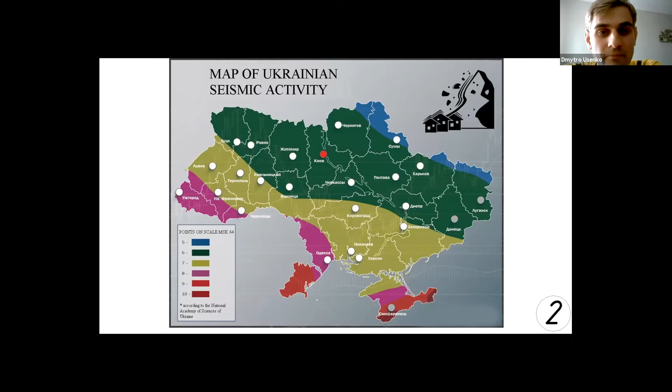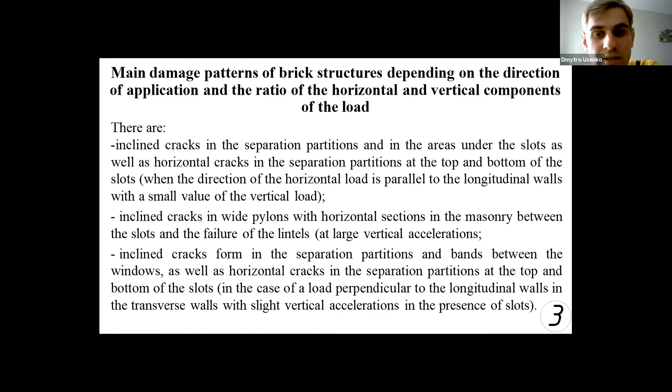So, an analysis of the effects of earthquakes made it possible to identify the main damage patterns of brick structures, depending on the direction of application and the ratio of the horizontal and vertical components of the load. You can find them on the screen. And one of the most vulnerable structures of brick buildings are the separation partitions.

Here, let's talk about stages of deformation of brick walls and methods of their calculation. On the screen, you can see the separation partitions of the buildings during operation can be at different stages of deformation. Three stages are given here. At the first stage of masonry deformation, when seismic forces are small, separation partitions work together with a window band over the entire contact area. The vertical load is transferred from the upper separation partitions to the lower along the entire horizontal section.

Subsequently, in the tensile zones of the horizontal section of the separation partitions at the levels of the upper and lower part of slots, adjacent to them, cracks form. The masonry monolithic is broken. This is the second stage of work. At this stage, the transmission of vertical and horizontal loads in the inclined sections is carried out only at the length of A sub C, smaller than 2A, where A is half of the width of the separation partition. 2A is the whole separation partition, and A is the half of it.

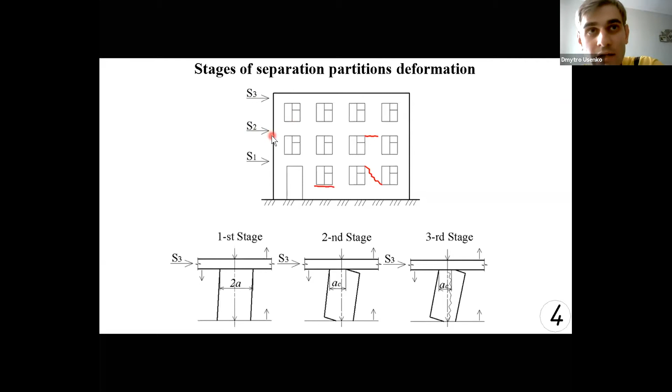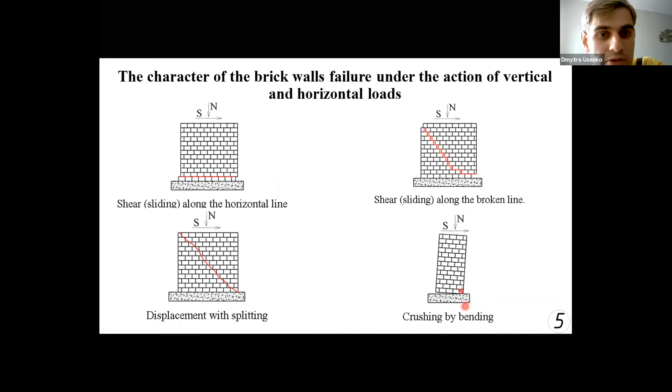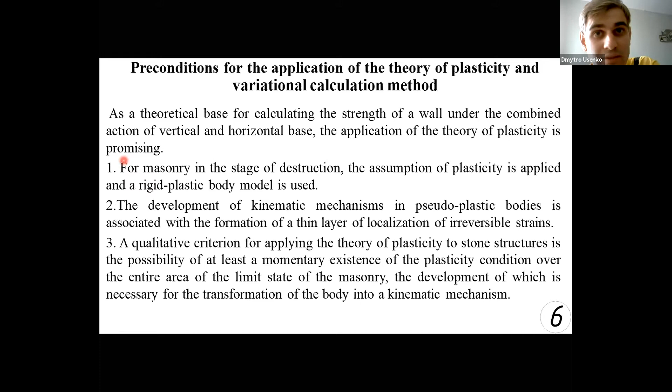The preconditions are on this screen: for masonry in a stage of destruction, the assumption of plasticity is applied and a rigid plastic body model is used. The development of kinematic mechanisms in pseudoplastic bodies is associated with the formation of a thin layer of localization of irreversible strains. And a qualitative criterion for applying the theory of plasticity to stone structures is the possibility of at least a momentary existence of the plasticity condition over the entire area in the limit state of the masonry, the development of which is necessary for the transformation of the body into a kinematic mechanism.

Let me also tell you about the variational calculation method. Problem solving in discontinuous velocity functions is used. At the National University Yuri Kondratyuk Poltava Polytechnic, a variational method in the theory of plasticity is developed to calculate the strength of masonry during crushing, splitting, and shearing, which is based on the consideration of the failure stage that takes into account the complete set of influence factors.

Diagonal failure can be considered as bilateral crushing, splitting, or just shear cut-off masonry. In this case, the failure surface consists of two shear planes along the edges of the wedge, which is formed under the loading platform, and the failure splitting areas connecting the corners of the wedges. An important issue in the application of the technique is the designation of the dimensions of the loading platform, which significantly affects

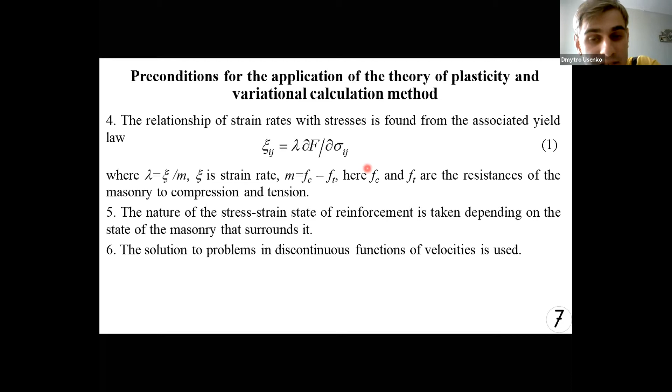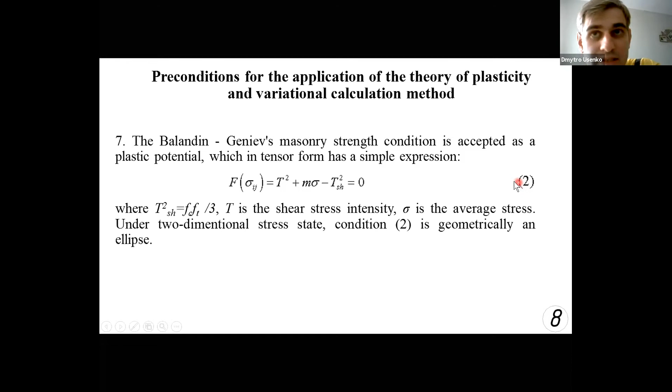their strength. The masonry strength condition of Balandin-Geniev is accepted as the plastic potential, which in tensor form has a simple expression, which you can find over here, formula number 2. Under a two-dimensional stress state, this condition is geometrically an ellipse. The functional of the method for a stone element in a two-dimensional stress state will be formula number 3.

So let's talk about masonry reinforcement. For increasing the bearing capacity of brick walls, the most effective are measures to contain the transverse strains of the masonry. Modern technologies of the international concern SIKA allow us to create and apply new materials with enhanced mechanical properties such as carbon fiber ribbons as reinforcing elements.

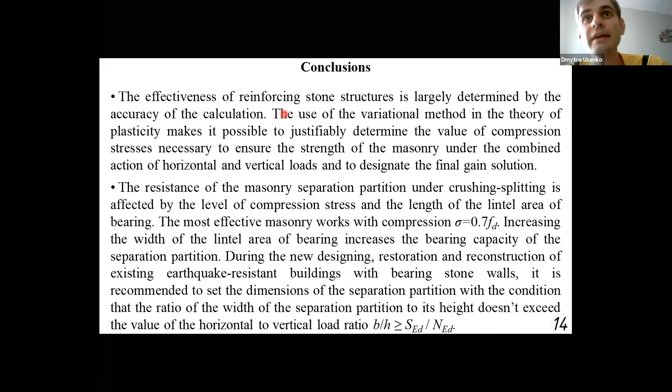So I have a question, one question to you. You mentioned about sigma over FD, the optimum value is 0.7. And so if you strengthen the masonry walls by using the carbon fibers, carbon ribbons, like which you showed us, in these tables, how do you decide the maximum value of 0.7? So if you have over 0.7, the failure mode is changed from the shear failure to the stripping on the bottom. So please explain a little bit more.

So here we have only 0.7 because if we take the relative compression stress over 0.7, it will be expensive and the relative compression stress will go down. That's why 0.7 is the most optimal value, because larger than 0.7, it will be more expensive but not so effective. Okay, so you determine the value by the cost of the strengthening.

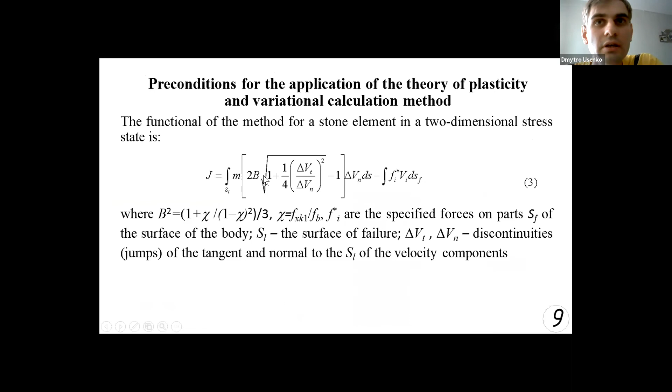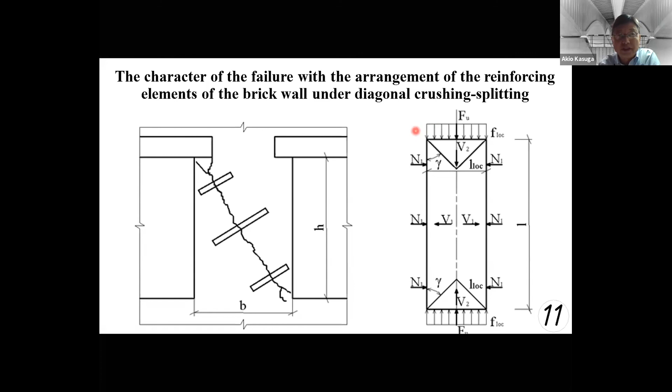So you strengthen the buildings on both sides? On the inside of the building, because one of the advantages of applying the reinforcement tapes is that we don't disturb the outside part of the building. Of course, we can make the reinforcement from outside, but it will break the exterior of some historical building, for example.

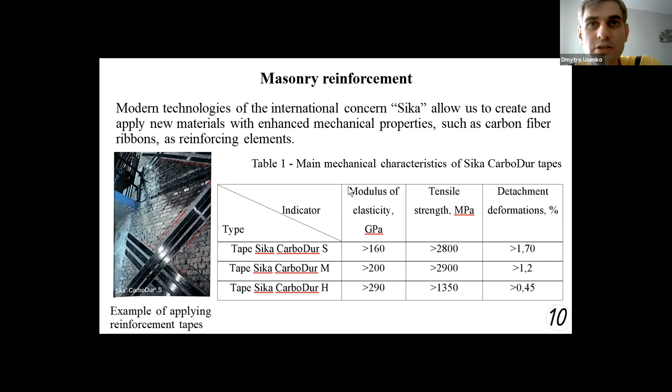Okay. So is your research almost finished, or do you have something to investigate a little more before you finish your PhD? Yes, I am a second year PhD student. I will study for 2 more years, so my research isn't finished. And frankly speaking, even after finishing my PhD, I will still do research because this is a very deep and interesting topic which I can research all my life.